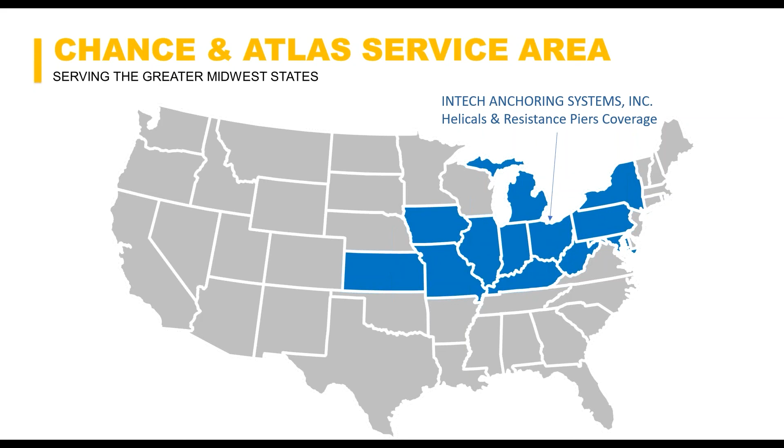So here's a graphic representation of our footprint with Chance helical piers and Atlas resistance piers. Like I said, we're a distributor. This is our territory where our partners are based. We have a lot of activity and experience in these areas with a lot of the local engineers and contractors.

So then this image shows the footprint of where we market our hollow bar micropile MagnaCore. As you can see, we're not restricted to a territory in the United States. We can also offer it out of the United States. So if you have any projects that you need design assistance or solutions for, feel free to reach out.

And then finally, here's our Hydroway footprint. We currently sell and market this solution worldwide, so reach out to us if you have a need for that.

So at this point, I'm going to turn it over to Joe with ChemGrout to present on grouting theory and practice. So feel free to take it away, Joe.

Okay, my name is Joe Schatz. I'm with ChemGrout. We're a manufacturer of mixing and pumping equipment for grout, and we have several machines for the application of anchors and micropiles. We're going to go through a little bit of the theory of cement, the water to cement ratios, and the quality control, and then we'll get into the actual practice of the equipment to use, the operations of how to use the equipment, and a little bit on the safety of the equipment.

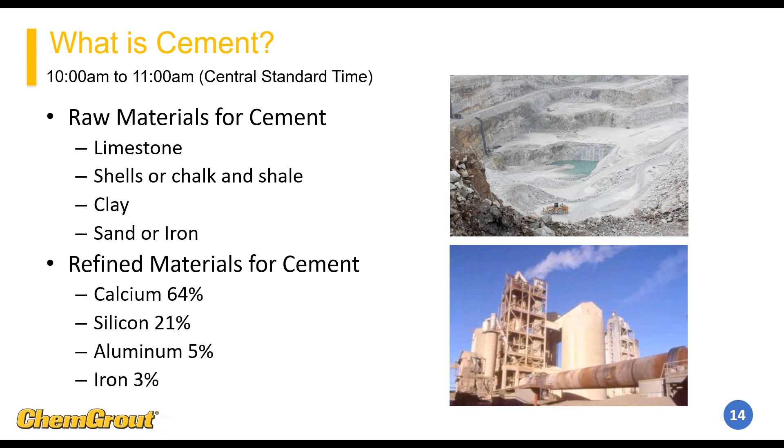So let's start by going through the grout theory. First, the main raw material is cement. Cement is made from several different raw materials: limestone, shells or shale, clay, and iron. And then they grind and refine these materials, and they get the raw materials of calcium, silicon, aluminum, and iron, the raw materials that are used for cement.

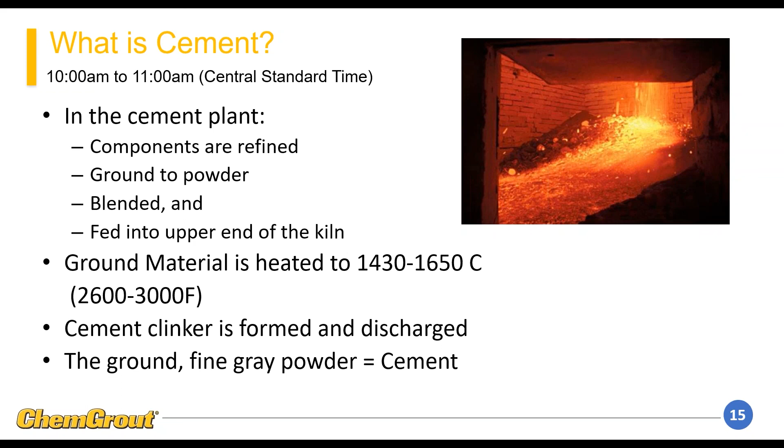Once they have the raw materials, they're all combined into a furnace and heated to a very high temperature, about 2600 Fahrenheit, and ground up into a fine clinker material that ends up being ground into cement. That's the gray powder that we're used to.

Cement's available in several different types depending on the combinations of raw materials they use. Type 1 and Type 2 are the normal raw materials. Type 2 cement is what most people mean when they say Portland cement, which has a moderate sulfate resistance.

The other types of cement are high early cement, which has a quick hydration, and type 4, which has a low heat of hydration for a longer working time. There's also a high sulfate resistant cement used in areas where there's a lot of sulfates, like in sewer systems.

There are other types of cements that are pre-blended. Microsil anchoring cement is regular Type 2 Portland cement with a little bit of aluminum powder for expansion, and often silica fume and fly ash, all pre-blended into the bags, ready to go. The results of the actual micro cement are high early strength, thixotropic properties so it doesn't wash out, and dimensional stability so it doesn't shrink or expand much.

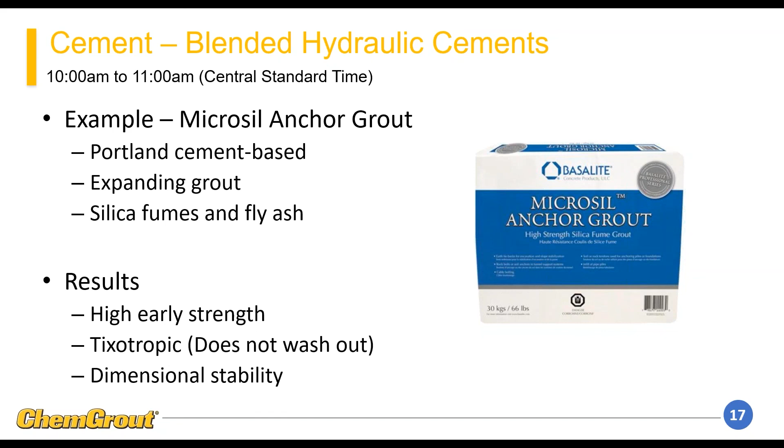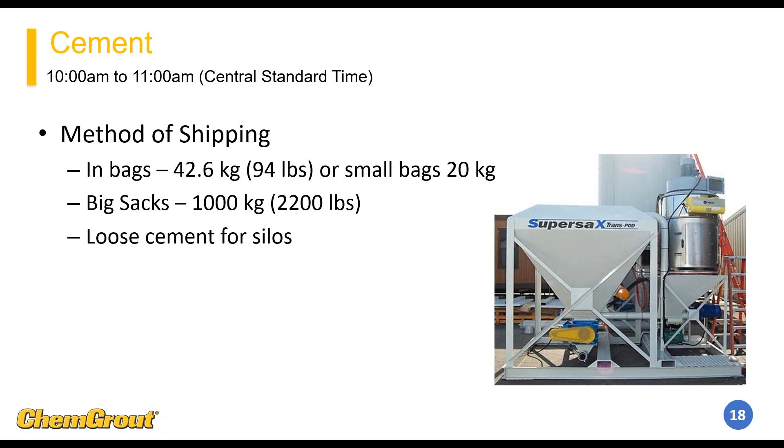Cement is usually delivered in either 94 or 47-pound bags, or it comes in large super sacks. More commonly recently, with the addition of silica rules, we're seeing a lot of either the super sacks or cement in silos used to feed our batching equipment.

Once we have the cement, the other ingredient is water, and the water needs to be clean, potable water. No organic particles in the water, so no river water, no lake water. Make sure it is clean, potable water, and ensure you have enough not only for batching the grouting, but for cleaning up afterward.

The next thing is the water to cement ratios. We can mix the water and cement in different ratios to achieve different strengths. A very common water to cement ratio is 94 pounds of cement to 5 gallons of water, which gives us a ratio of 0.44. We also show some of the metric units.

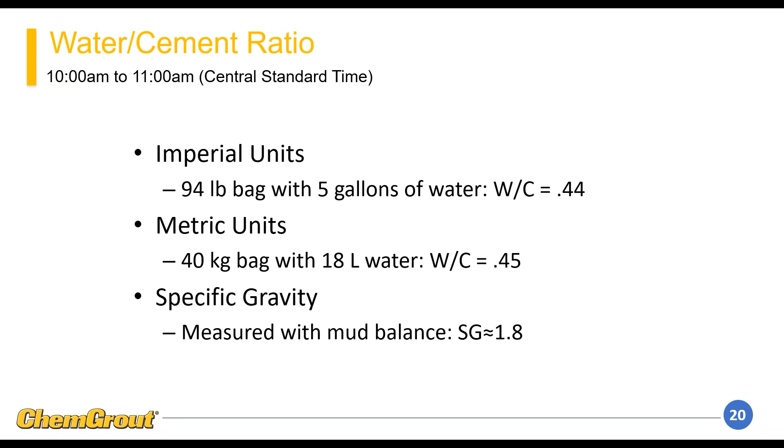When we mix this up, one of the main quality control tests is the specific gravity, measured with a mud balance. For 94 pounds of cement with 5 gallons of water, the typical mud balance specific gravity reading will be 1.8.

In our hollow bar grouting, we have two different types of grout mixes we're going to use. We use a flushing grout while we're drilling, and then when we're done drilling, we pump out all the flushing grout with a structural grout.

The flushing grout is usually a water cement ratio of 0.8, which would be 3 bags of cement to about 27 gallons of water, yielding about 38 gallons total volume of cement slurry. That's what we mix up to use for drilling.

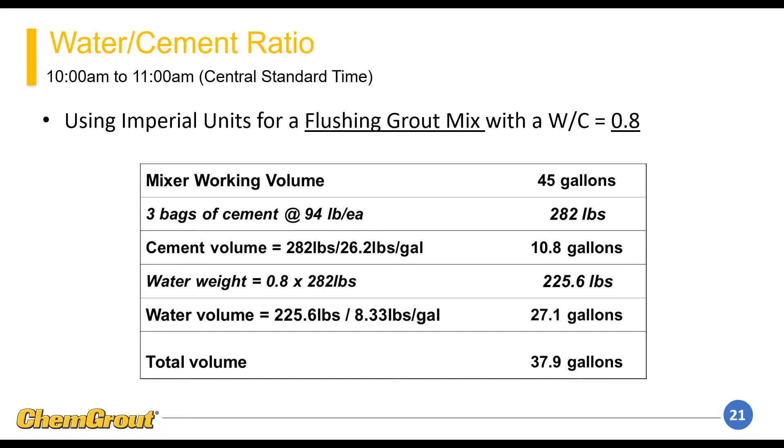The other mix used in hollow bar grouting is the final mix, the structural grout, which has a water to cement ratio of 0.45, typically about five bags of cement to about 25 gallons of water.

Once you're done with your batch, you need to measure the specific gravity of the grout, which will tell whether we've mixed the ingredients in the right proportions. The mud balance involves taking a small sample and putting it on the scale, which weighs it out and tells you the density of the grout. We're looking for 1.8 specific gravity, plus or minus about 0.02.

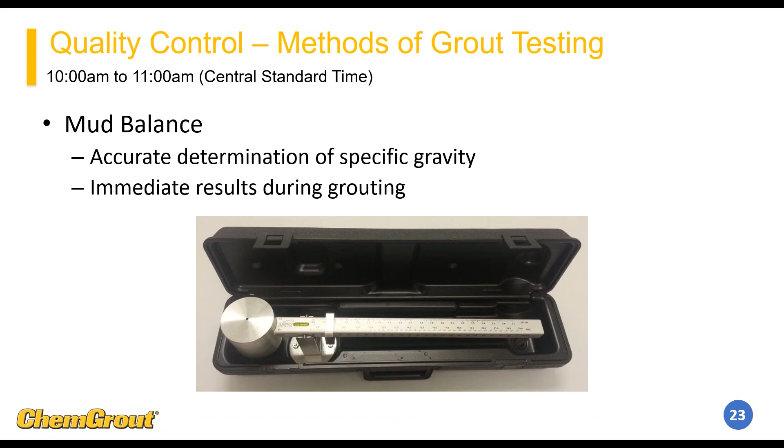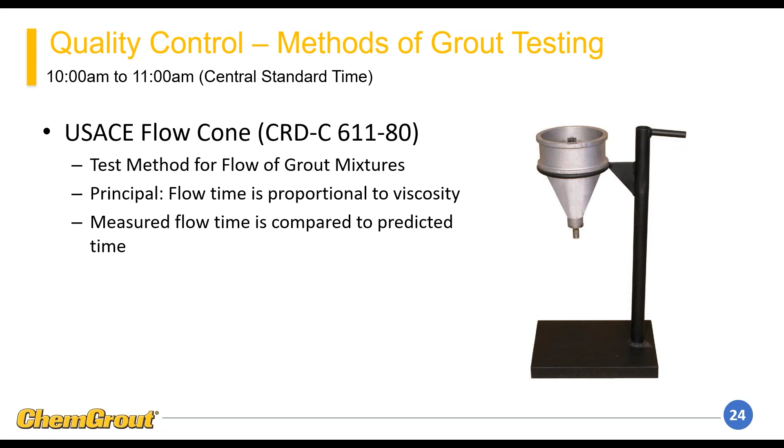Another quick and easy measure is the flow cone test, which measures the viscosity of the grout, another way to determine the proportions. But it's not as accurate as the mud balance. You can do the flow cone test temporarily to get a quick and dirty number, but you really need the specific gravity test with the mud balance to get the accuracy.

A lot of projects will require grout cubes to prove the grout is not only mixed in the right proportions, but that the cement was not old. They'll take samples with these grout cubes, set them aside, and do a compressive strength test at different days during the life of the sample. Typically they'll do a break at 3 days, 7 days, 14 days, and finally one at 28 days. That's just a final check, because it's too late to change anything on the job site.

The grout, cement and water gains strength during its hydration process, and it takes quite a while to fully hydrate the cement. At day 1, you'll have about 45% of the total strength you're going to gain. At day 7, you'll have about 75%, and at day 28, the day most cubes are done for the final test, you'll have about 90% of the overall compressive strength of the grout. Just a note here: adding a little bit of water really changes the grout strength properties. A 25% increase in water will decrease your grout strength by 50%.

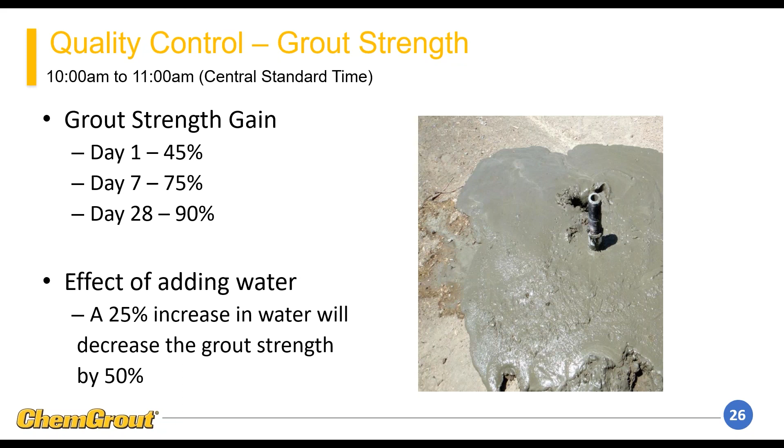Quality control is important on the job site, so you are going to have to report and record a lot of the conditions on the job site. You're going to have to record what type of material you're drilling through and the condition of that material. You need to measure the grout pressure

that you're pumping with to try to get an estimation of the body of grout that you'll have around the anchor. You're going to want to measure the total volume of cement that you injected into the anchor, and then you're going to have to do a test after you've flushed out all the flushing grout and are pumping in the structural grout. You're going to need to do a little sample at the top of the hole to assure that the structural grout is getting all the way back up to the top of the hole.

One of the ways you can measure the amount of grout is to measure the flow rate, or the stroke count of the pump you're using, or use a mag flow meter to record the total volume that you injected in there. And then finally you'll do the water to cement ratio based on the mud balance, which will give you your final specific gravity number.

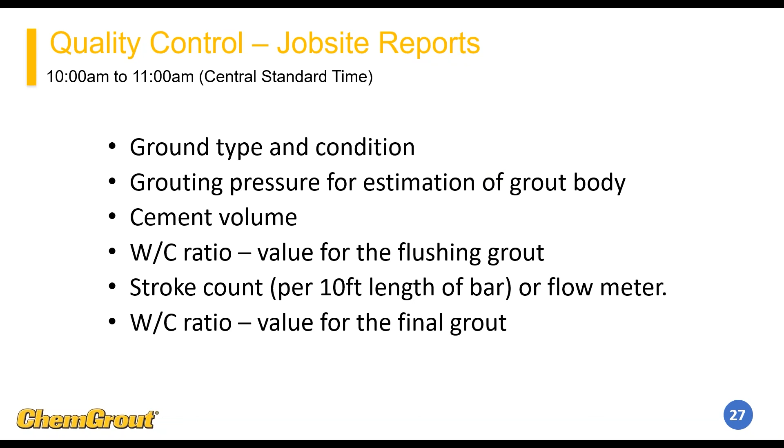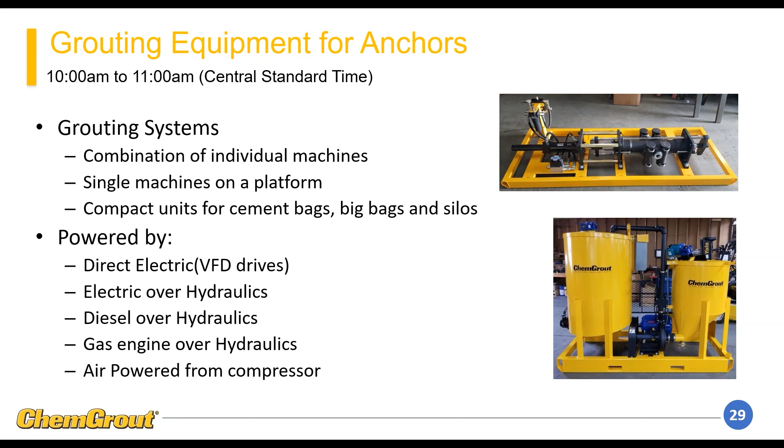So once we have our grout mixed up, let's talk about the equipment and actually installing this material. ChemGrout makes several different types of mixers and pumps for the grouting of anchors. We have a combination of piston pumps, plunger pumps. We have mixing systems of colloidal mixing and shear disc mixing. And then we offer those in several different power options, whether it's electric or diesel or gas or compressed air powered units.

One of the main pumps we use for grouting anchors is our double-acting high-pressure plunger pump. The plunger pump is used because it delivers very high pressure. It delivers a known volume based on the plunger volume, and it's available in variable speed, so you can speed up and slow down the pump. We use our plunger pumps because piston pumps have a very high wear cycle, and the plungers last a lot longer.

We have a couple different types of mixing systems we offer for making colloidal grout. When you're doing hollow bar anchors, you need to have a high shear colloidal type mixer so that you have adequate wetting out of each individual cement particle. There's two ways that we achieve that. One is with what we call a shear disc, which is a high-speed disc rotating at about 3,000 RPMs in the bottom of the mixing tank, and it shears up all the different cement particles. And then we also offer colloidal shear mill pumps, which is a centrifugal style close tolerance pump that offers a high shear into the material. Both of them will achieve a colloidal mixed grout. The shear disc takes a little bit longer than the colloidal mixed pump, which is much more efficient.

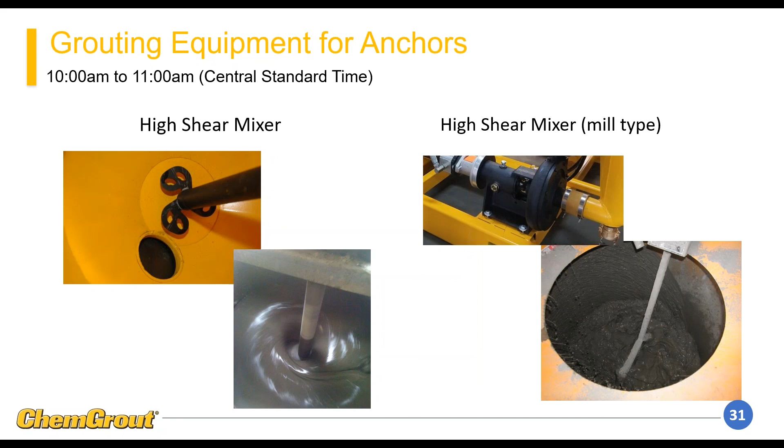One of the primary units used for grouting hollow bar anchors is our CG680 high pressure unit. This would be used on large projects where you're doing a lot of anchors. This pump will do 32 gallons a minute. The normal pressure is about 1500 psi, and this one is one of the units that has the high-speed colloidal mix pump, and then it has an agitator tank, and then it can be powered either electric or diesel. The controls on the pump allow you to vary the flow rate and the maximum pressure that you're putting into the hollow bar anchor.

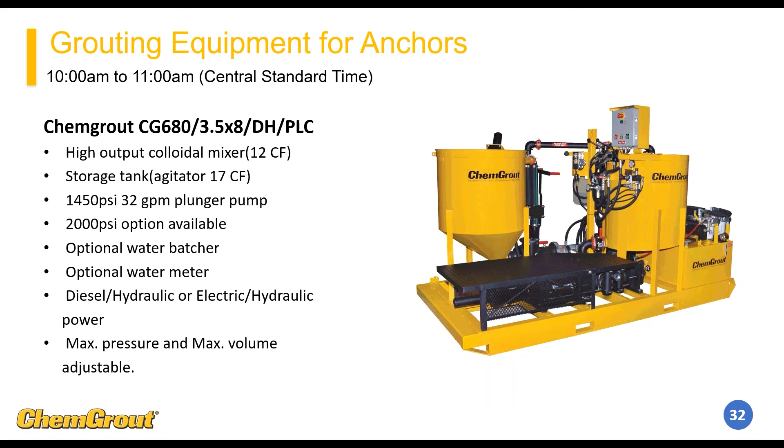We also have a shear disc model, which is used for smaller projects. It has the advantage of having two separate mixing tanks so that you can have flushing grout and structural grout mixing at the same time.

This pump we set up at about 2000 psi to deliver that amount of pressure into the bit to create a bigger grout bulb around the anchor. The high pressure plunger pump is a very simple pump, very easy to clean. This unit is available either air powered or hydraulic, and the hydraulics can be powered by a diesel engine or by an electric motor.

Some of the instrumentation that we like to use: to measure the volume of grout you're actually putting into each anchor, you can use a magnetic flow meter. A magnetic flow meter is non-obtrusive, and the material goes right through the sensor area, and you can measure the flow rate and totals. There are two totalizers, so you can get the total for each hole, and you can also get the total for the entire day.

The other instrument is a pressure gauge, which lets the operator know how much pressure is going into the hollow bar anchor. If you see pressure rising, you can see if the bit may be getting plugged up with clay or debris stuck in there. Between the two of them, it's a good indication of what's going on at the end of the drill bit.

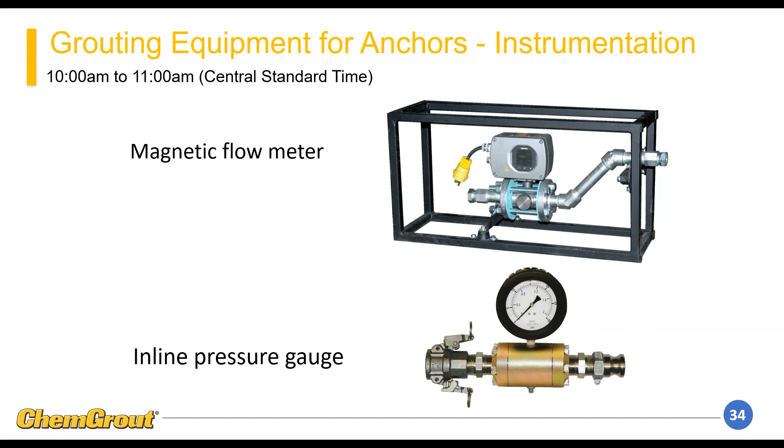For some projects that require recording, we have a monitoring system, a data collector, which takes the data directly from the mag flow meter and from the pressure transducer, and you can get a pumping profile of flow rate versus pressure for each individual anchor. On the actual recorder, you can give it a hole number or an anchor number, so at the end of the day you have a full record of how much grout went into each anchor and what the pressure and flow rate was during the injection.

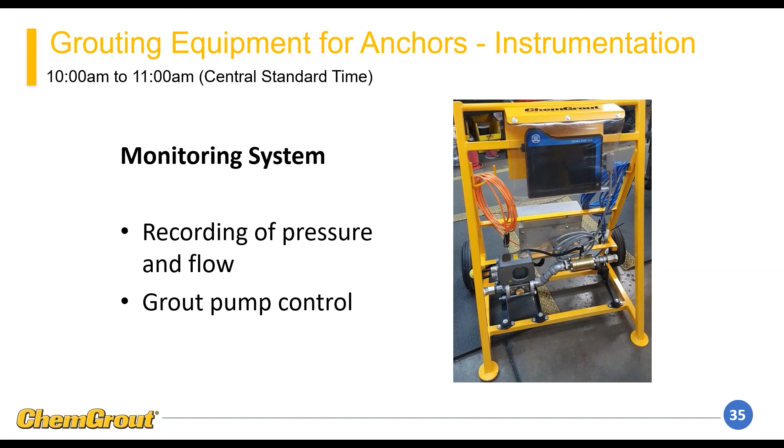We'll move on now to the operator side of things. One of the most important things we can do when grouting is have a trained operator and keep that operator with the machine. The operator should be responsible for not only operating the equipment, but cleanliness of the equipment and minor maintenance, such as greasing the seals.

If a highly trained operator stays with the machine, this will reduce your overall costs of repair and maintenance, and we should have a backup operator available in case our primary guy is sick for the day.

When staging, before you're actually grouting, you want to stage the machine in a central location so that you can just move the hose around and keep the machine in the same place. You want to have sufficient room to store your cement materials and keep the materials out of the sun if it's a hot sunny day.

The mixer and pump need to be on a nice level location, especially if you're using a water batcher where you're trying to measure the water. The equipment should be set off the ground a little bit so that it's not in the mud, or up on some pallets, and right next to that you should have some pallets for the cement and for the operator, and also a couple of pallets for the empty bags.

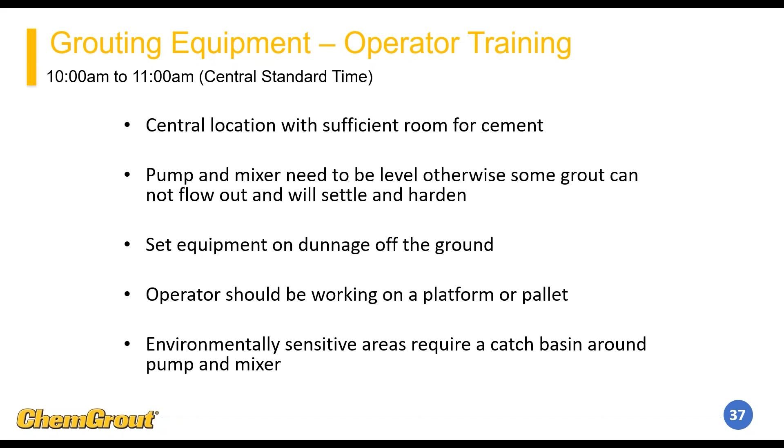One of the things you want to do before you begin grouting is make sure the machine's nice and clean. You want to grease all the grease fittings and add oil to the air motor lubricators. A good way to keep the machine clean is to spray some biodegradable oil or some PAM cooking spray on the outside of the machine, so that when you go to clean it off, it won't be stuck to the machine.

You want to check the engine oil and top off the fuel tank, making sure you have fuel for the day. Check the oil level in the hydraulic tank and check the filter indicator to make sure that you haven't overpressurized anything. Before you begin mixing, check the insides of the mixers and holding tanks, making sure they're clean with no foreign debris and everything washed out. Last, make sure you have a sufficient supply of water to grout all day and enough to clean up at the end.

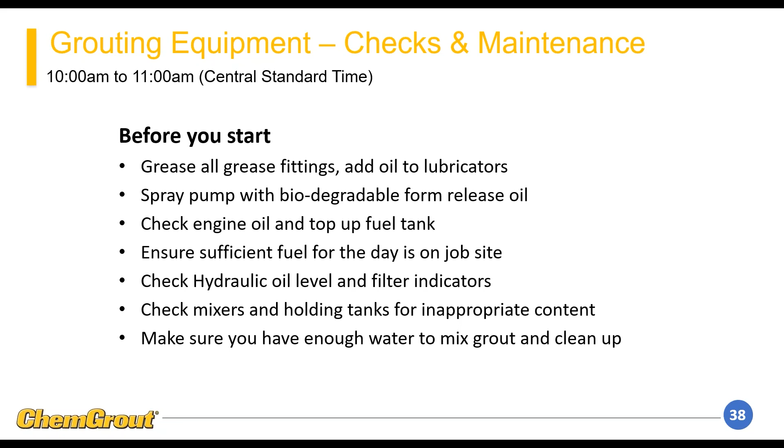When you're starting up the grouting operation, you have to keep ahead of the drill. Before they start drilling, make sure you have sufficient flushing grout mixed up in both tanks so when drilling starts you have enough material to keep them drilling. If you run out of grout during drilling, you need to stop until you have enough made up. If you don't have grout, the drill bit will plug up and you'll have to pull out the entire string and put a new drill bit on, possibly losing the hole.

The other thing is if you don't have any grout and you leave the pump out, you can actually pump air down into the anchor, compromising the bond and corrosion protection on the hollow bar anchor. You need to be able to flip over to straight water.

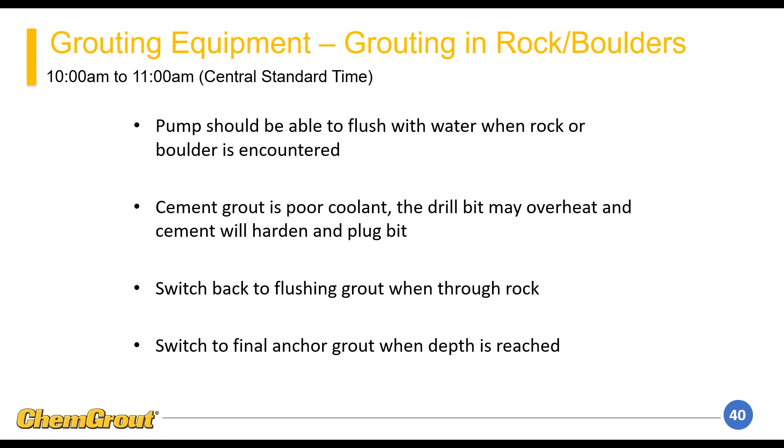There's a valve on the bottom of the tank where you can add water directly to the pump. If you happen to encounter a boulder, you don't want to be drilling with flushing grout or cement at all. Cement's a poor coolant and it may heat up really quick and flash set in the bit. So when you get to a boulder, you need to flip over to water. The water can act as a coolant until you get through the boulder, and then immediately after, switch back to the flushing grout, drill through the rock, and when you get to final depth, switch over to the final grout and grout it all the way back to the surface, measuring the density at the top with the mud balance.

At the end of the day, the cleanup is very important. If you want the next day to go really good, tonight's cleanup is important. So run clean water through the entire mixing and pumping system all the way through the hose. Use sponge balls to clean out any scale that happens to build up on the inside of the hose. Then use a pressure washer to clean the inside of the mixer, the holding tank, and the outside of the machine.

After you're done cleaning up, you want to turn everything off for safety, but check the pump body, check the suction and pressure valves for any grout deposit that built up during the day, and then use a hand brush to remove any grout stuck on the outside of the tank and inside the mixing tanks.

After you're all done, make sure that you leave all of the valves open and the slide gates open so that if it happens to rain overnight, you won't get a collection of water in the mixing tanks. Especially in the wintertime, when the water could freeze inside there and damage either the pump or the mixing systems.

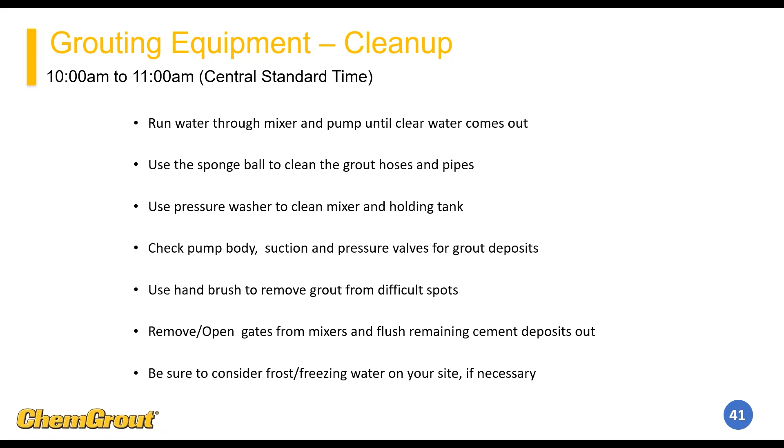Lastly, we'll talk about operator safety training. Some of the protective equipment that is common for grouting operators includes gloves to keep the cement off their hands, rain gear or a Tyvek suit to keep the cement powder and mixed grout off your clothes and skin. Safety glasses and a dust mask are required. Cement is good to protect steel, but it's corrosive to the skin and it can cause chemical alkaline burns.

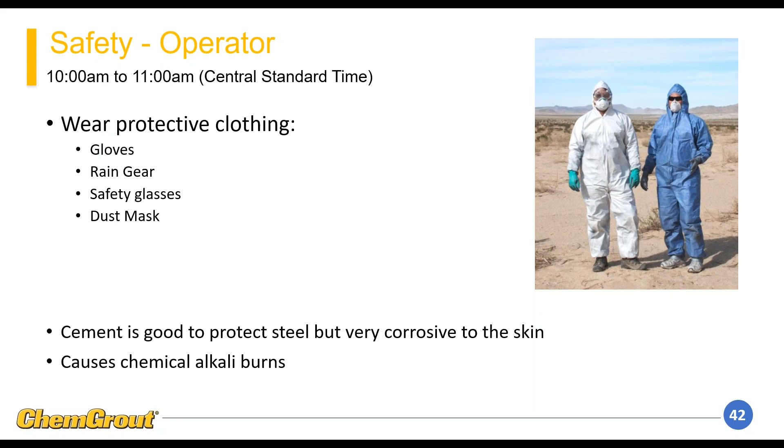It's important that you supervise new workers, stay with them, and train them on all the different procedures that need to be done, and don't just put the guy on the machine and tell him to go to work. Somebody's got to actually train them on what the procedures are and what the mixing ratios are.

They need to remember that grout needs to be flushed off their skin immediately. If left on for a period of time, 3 to 5 minutes, it can start to cause third-degree burns on your skin. So it's important to either have gloves on, and if you don't have gloves and happen to get some on your skin, just rinse it off immediately.

It's very important before you do your cleaning and maintenance work to make sure that you've shut down the equipment and locked it out, de-energizing any potential compressed air or hydraulic pressure, so that it's safe when you're going in there to do the cleanup and maintenance.

Please never stick your hand into a moving mixer or a running paddle. There's safety stickers on the machine to warn you, but please don't stick your hand into the mixer. And please prevent tools from falling into the mixer tank. Make sure nothing can fall in from above, and maybe tie a string onto your cutting knife and tie it to the machine so it cannot fall into the mixing tank.

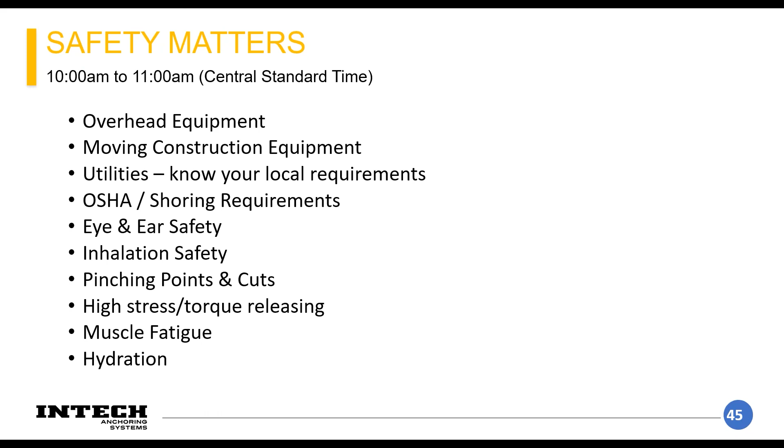Especially with it currently being summer, another thing some people don't think about is don't overwork yourself. You can't continue to do work if you're fighting heat exhaustion. Make sure that you're taking breaks when you should be and maintaining hydration.

A thought experiment that I always like to do is trying to get yourself into a third person. What would you do if you were watching yourself work, or what would happen if your spouse, a family member, a friend, or a coworker walked by? Would they think that what you're doing currently is safe? That task that you're doing, are you doing it safely?

With this constant mindset, it kind of takes you out of the moment of 'oh man, this is really tough, I need to get this done and rough it in there' sort of mentality. It can help you take a second, take the emotion out of it, and get a new perspective - maybe you'll look at it and say, 'I could have been doing this a totally different way and it would have been way easier.' Having that mentality will help you get home safe every day.

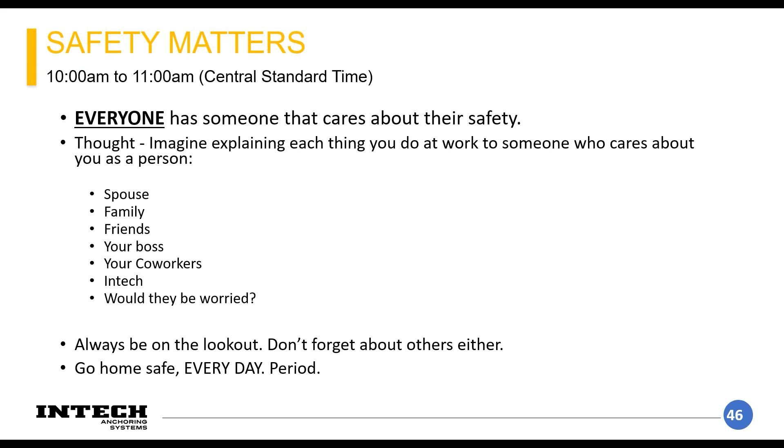And that is the most important thing - make sure that you and all your coworkers and employees are getting home safe every day. So that's my safety soapbox, and now I'm going to get on to the really exciting stuff.

I'm going to start out with each type of element and discuss the individual components of each element and their installation. Then I'm going to go into the engineering design principles behind them.

I'm going to start out with helical pull-down micropiles. Before I really get into the helical pull-downs, I wanted to start with a quick refresher on helicals themselves. Basically, a helical anchor is just a large steel screw that we use to torque into the ground until we find something stiff enough to get capacity. Just like a screw, the element consists of a shaft with some flights welded onto it.

When we transmit torque from a drive head, kind of like a drill, into the shaft, it turns the flights. The flights then screw into the soils and engage the soils until a specific torque or depth is met. It follows that the harder you have to screw the pile into the ground, the more capacity you get out of the pile. Once you get to the end of your element, we finish that pile with a plate termination that gets cast into a footing.

Generally we have two flavors of bare steel element: the square shaft and the round shaft. The square shaft is a solid square shaft that ranges in dimension from 1.25 to 2.25 inches. These shafts are generally our most economical option because they have a high relationship between torque and capacity, and they're generally less expensive.

Our second flavor of bare steel element is round shaft. These are a hollow steel section of structural tube that range in dimension from 2.875 inches outside diameter to greater than 4.5 inches outside diameter. These types of shafts are advantageous due to their ability to resist lateral loads, and they have a better unbraced length strength. However, these round shafts are slightly more expensive, so for the most part we only select them when we have concerns for lateral stability, a relatively thick weak soil down in the profile, or a weak soil near the surface of the profile.

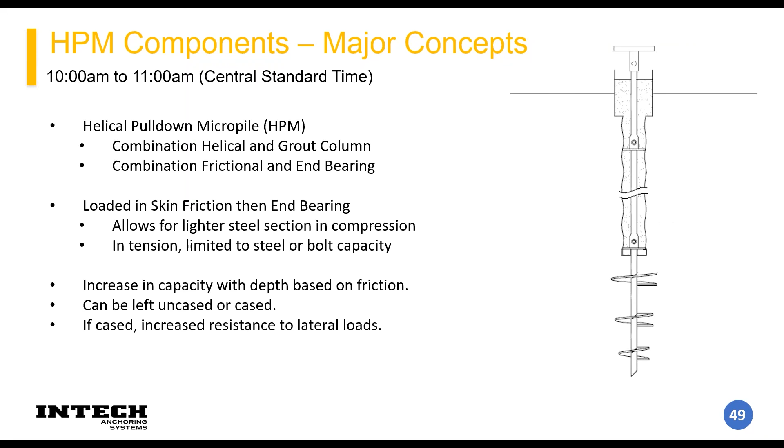Additionally, these elements have the option to be either left uncased, where the soil is the outside diameter, or cased for the upper depths, which is what we typically see. If casing is used, it can be used to bolster the lateral resistance of the pile section.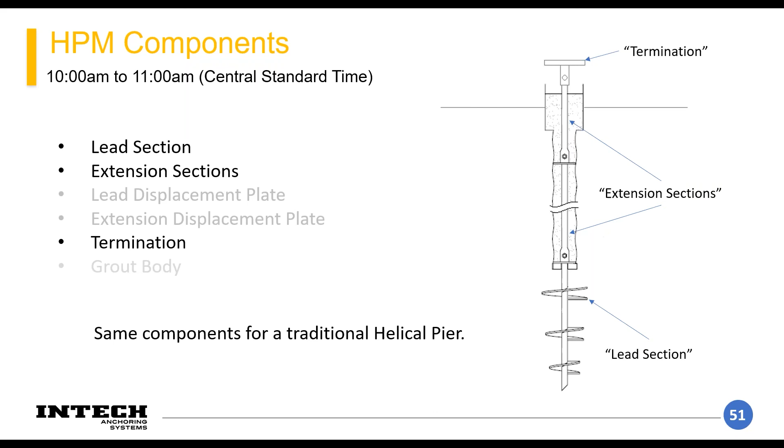Here's a list of the major components for the helical pull-down. These sections are literally just the same components as a typical traditional helical pier: you have your termination, your extension sections, and your lead section. The only difference for the helical pull-down micropile is you add the lead displacement plate, the extension displacement plate, and then you have your grout body.

For the uncased pile, the size of the lead and extension displacement plates will dictate the design section of the element that is installed. For a cased pile, we typically use the size of the smaller extension plates that'll go through the casing, but it'll be dependent on your specific pile design.

Here's a closer look at the lead and extension displacement plates. You can see on the bottom right, the lead plate is a round steel plate that slips over the bar, and it has two paddles that displace the soils as the bar is turned. At the top right, you can see the extension displacement plate is that same round steel plate that slips over the bar, but it doesn't have the paddles.

These are put at each extension section that is added to the bar during installation. When you get the bar sticking up out of the ground, you add one of these, then you add your extension. I think there'll be a visual representation of that in a moment.

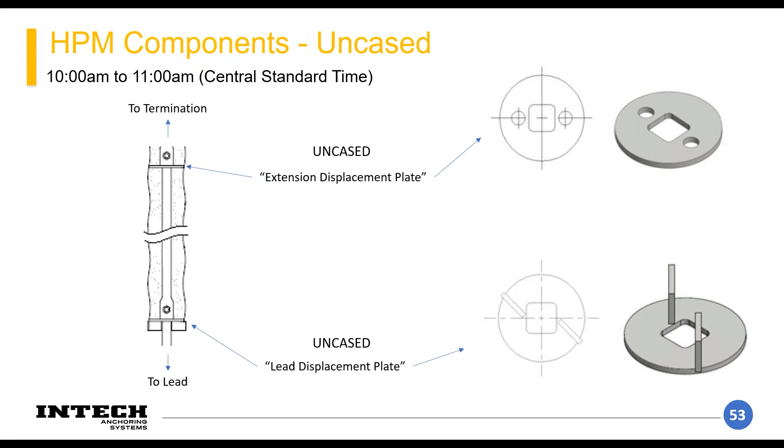So then the same thing happens. The bars torque the round plates, which turns the paddles and displaces the soils with the lead displacement plate, and then maintains the hole diameter during install with the extension.

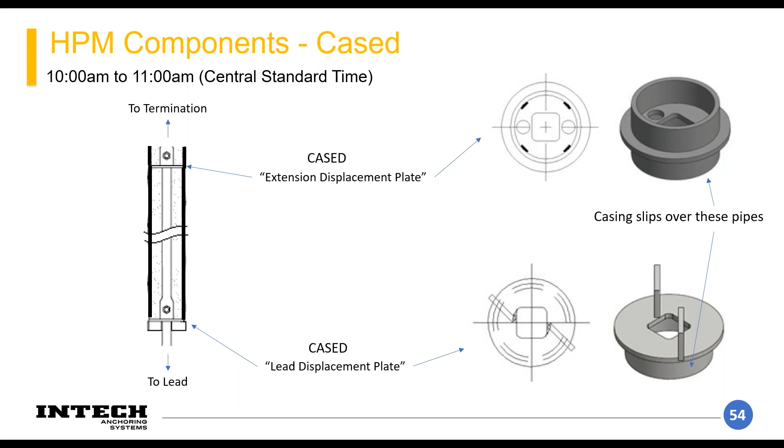For those of you who are more visually inclined, this should give a good idea of what it looks like to install a helical pull-down micropile. This is my first example - I'm going to show an uncased installation, and it'll include a grout column for all the extensions.

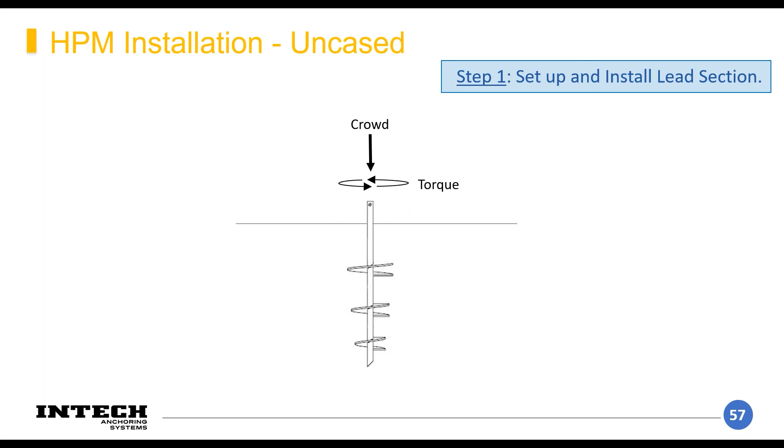First, you set up and install your lead section by applying crowd with your equipment and applying torque with your drive head. You're pushing down and screwing the lead section into the ground. You're not drilling - you don't want a bunch of spoils to come up out of your hole. You just want to move the soils out of the way slightly, and you do this until there's a little bit of stick up out of the ground.

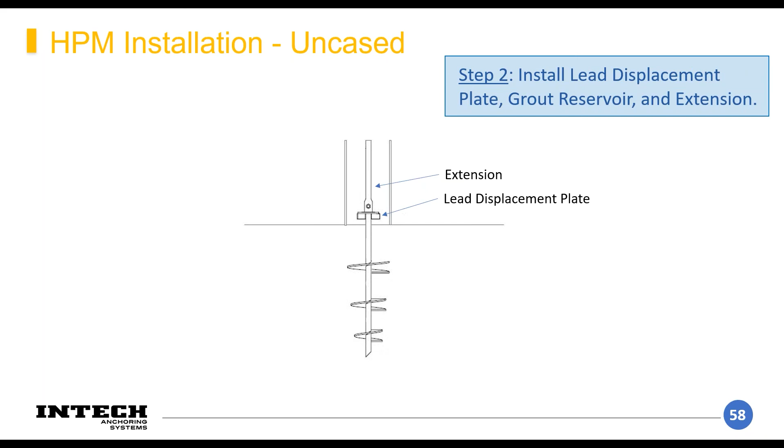After that, you add your lead displacement plate, the one with the paddles, and then you add your extension. You also want to set up a grout reservoir that'll hold grout during your installation.

We usually see this being done with just a sonotube, and it needs to hold enough grout to where you're not constantly filling it, but not big enough to where you spill out excess grout at the end of the element whenever you take it away. Another note is you're probably going to have to bury the reservoir a little bit or seal it around the bottom so grout doesn't come out.

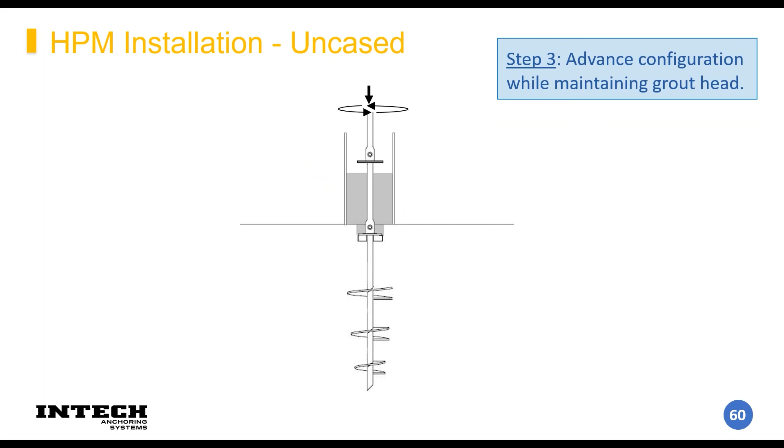So you fill your grout reservoir, and then the next step is advancing your element, applying more crowd and torque. The extension displacement plates and extensions should be added as necessary as the configuration penetrates the ground.

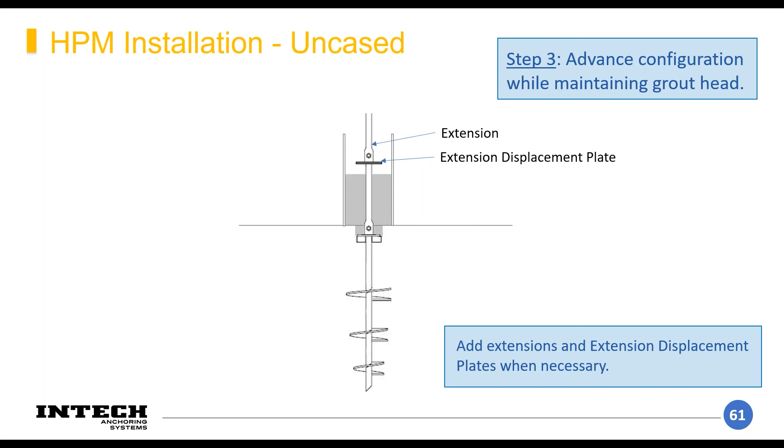You can see you've advanced it a little bit. The lead plate is digging into the ground, starting a column, and you're just maintaining grout and adding extension plates as you go. So the lead plate creates the annulus, and the grout creates the column.

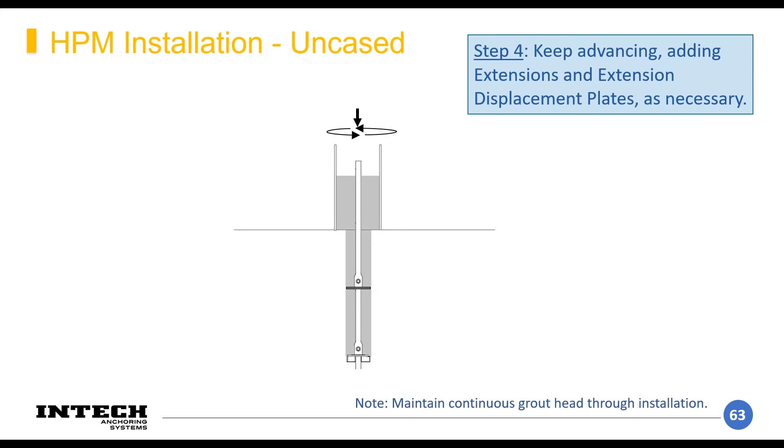Keep doing the same thing - applying torque and crowd, adding your extension plates and extensions as necessary - and you maintain your annulus, and your lead plate creates even more of a column as you go down. Then once you achieve your depth and torque, you can cut off excess shaft and terminate it with a pile cap.

One thing that's important to note on these elements, as they're both frictional and end-bearing elements, it may be necessary to double check that the installed pile meets your design criteria. What I mean by this is if you torque up early, it may mean you have less frictional resistance than you planned on for your design. So you just have to check that the combination of the steel helical and the leads can take on the remaining load, and that the soils can calculate out to take the loads as well.

So if you're doing an initial design or installation of one of these and you run into this and you're worried about it, just reach out to us and we can help troubleshoot it with you and help come up with a solution to get it to work.

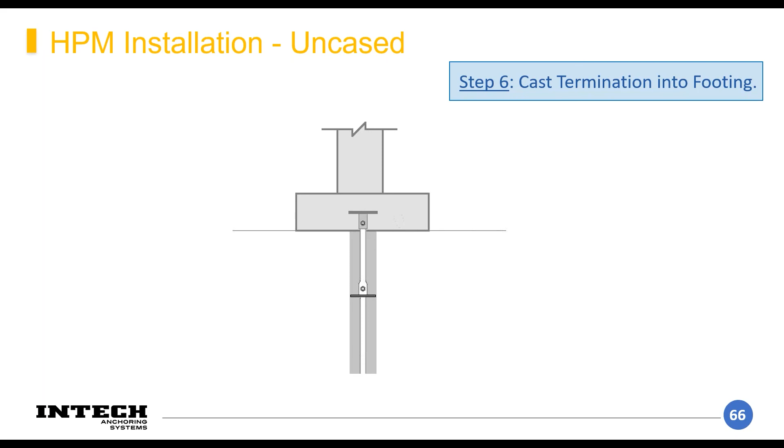At this point, the foundation contractor will cast the termination into the footing. It's important for design to have the cap in a spot that doesn't interfere with the other reinforcing in the pile cap. That'll ultimately be on the structural engineer of record for the footings, though.

So here's the completed element with each of the components that we discussed.

Now I'll go into our second example of installation, but this time it'll be for a cased element. The installation is mostly the same, but there's a way that we'll handle the grout and extensions that'll be slightly different at the beginning of the install. I want to note that you can fully case your element, but we find that that's relatively uncommon.

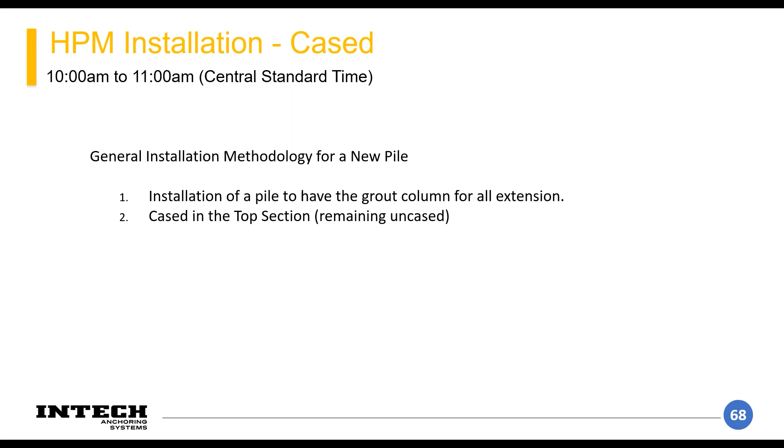What is more common is to install casing in the upper 7 feet or so for lateral resistance. So with this method, we'll install casing in the upper portion of the pile and leave that casing up top while we continue our pile down, just so that we can resist that lateral load within the range that the moment has to resolve.

Just as before, we start by advancing the lead section. We apply crowd and torque until the element is mostly into the ground. At this point, you'll add your cased lead displacement plate, extension, and casing.

Before you advance the pile, add your extension displacement plate, then you slip your drive head over the shaft. You want to kind of sandwich the casing between the extension displacement plate and the lead plate. You want to do this in a way that it keeps them together, but you're not pushing the system into the ground. You're just keeping them tight, and the lead flights should pull everything down while the drive head keeps them sandwiched together.

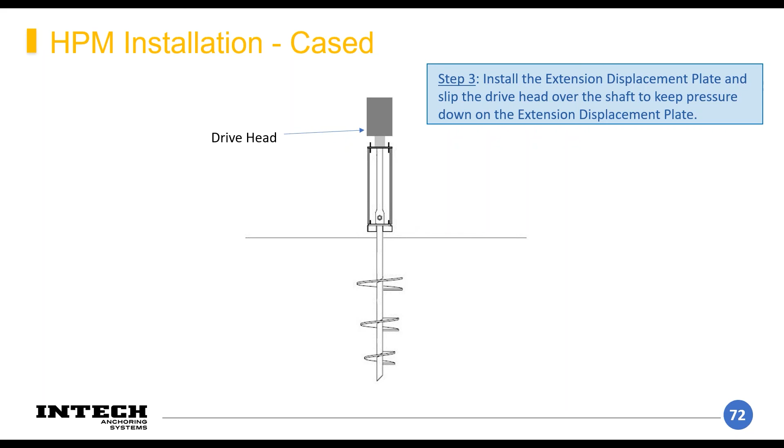So with that, you pull your amount of casing into the ground, but not far enough to where you can't retrieve your extension displacement or your extension plate.

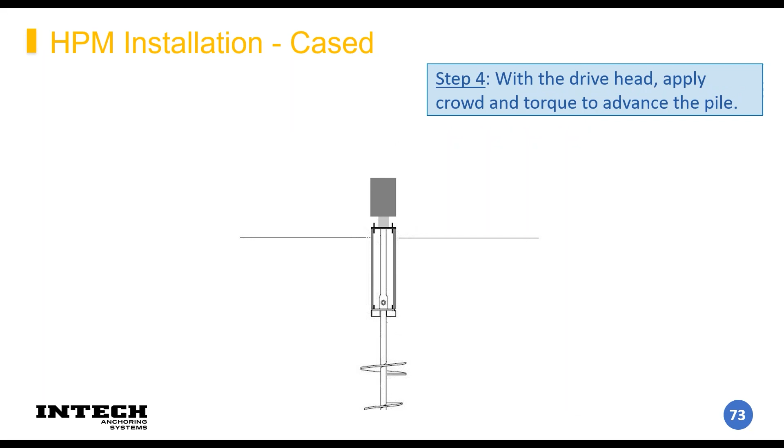At this point, remove your cased extension plate and install a grout reservoir. Fill the grout reservoir and add extension plates and extensions as necessary to achieve more depth.

Note that for these elements, you switch over to a specifically sized extension plate that fits inside the diameter of the casing. Typically for design, the lead displacement plate is slightly larger than these extension plates, so we slightly reduce the pile diameter to the smaller extension plate diameter or somewhere in between.

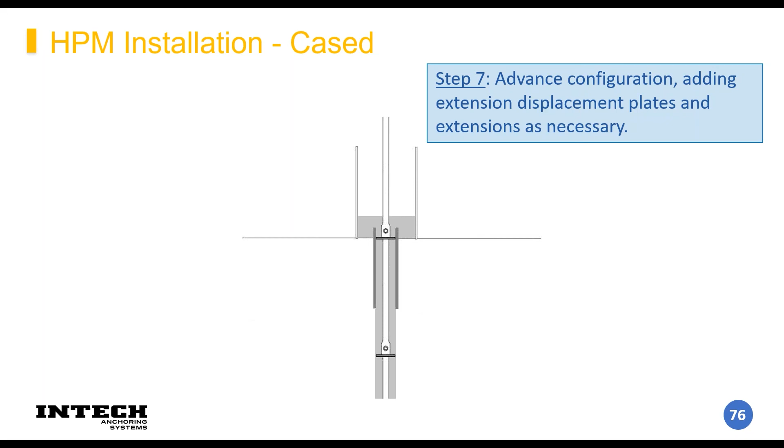You repeat this process, adding more length of pile with the extension plates being slightly smaller and passing through the casing as you go. You keep creating that annulus as you go with depth so you can have a relatively long micropile section that isn't limited.

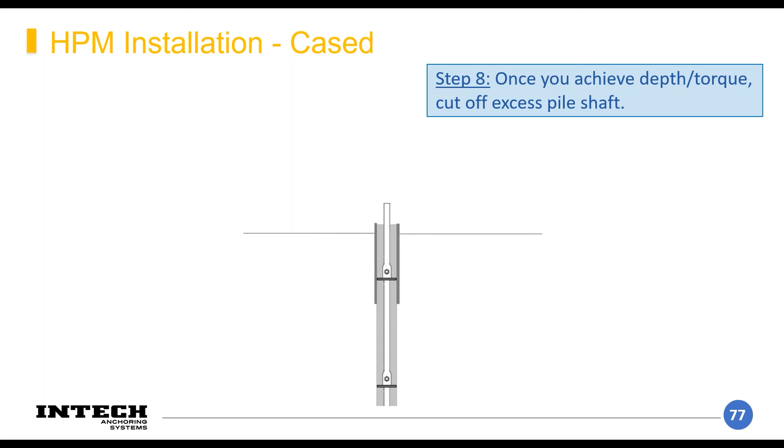Once you get to your torque and depth, you can cut off your pile. Like I discussed earlier, make sure you pay attention to both the length and torque on these. Since they are both frictional and end bearing, you might have to make some adjustments during construction to make sure the installed pile meets the requirements for the project.

Now you've taken away the reservoir, you cut off the shaft, and then you just fit a pile cap on top and bolt it if necessary, and that's it. Now the termination gets cast into the footing and you're done.

Here's a representation of a completed, partially cased helical pull-down micropile.

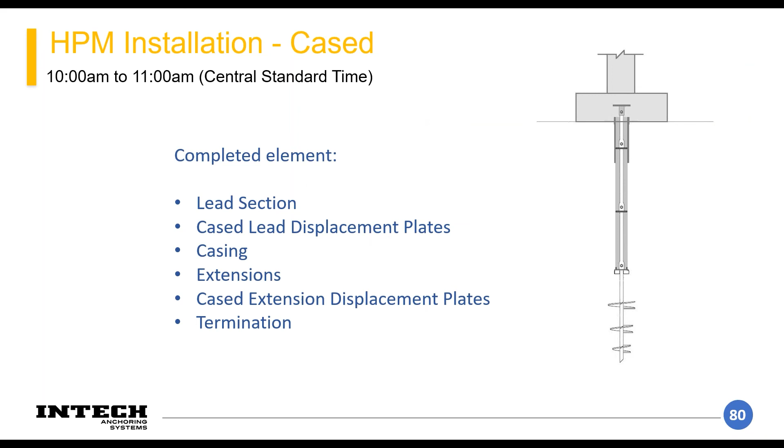Here's a couple pros and cons for the helical pull-down micropile and when to use it. Like discussed before, you can use less steel section by carrying more load in the grout and friction. The torque should be monitored during installation, and we can go back and figure the strength of those materials we penetrated to double check calculations so you get confirmation. You get an increase in capacity carried from the skin friction and also get additional strength in end bearing, which is good, especially if you don't have something really hard. If you have a marginal soil or stiff, you can get some of that end bearing.

You can advance casing with one piece of equipment. You don't have to go in and install it beforehand. You can pull it down with your element, and it's a good one-pass with a gravity-fed grout annulus installation method. So it helps keep the hole open during installation. You don't have to put in and withdraw casing as you install.

Some of the cons include: the grout needs to set up before load testing. This can be alleviated through admixtures or starting with a higher strength grout and confirming your grout with breaks, but that's just something you have to watch out for. Also, you can't penetrate into rock sufficiently to create a rock socket. You can get the tip to seat into the rock a little bit and count on the shaft to structurally transmit the forces, but you can't fully get a rock socket in.

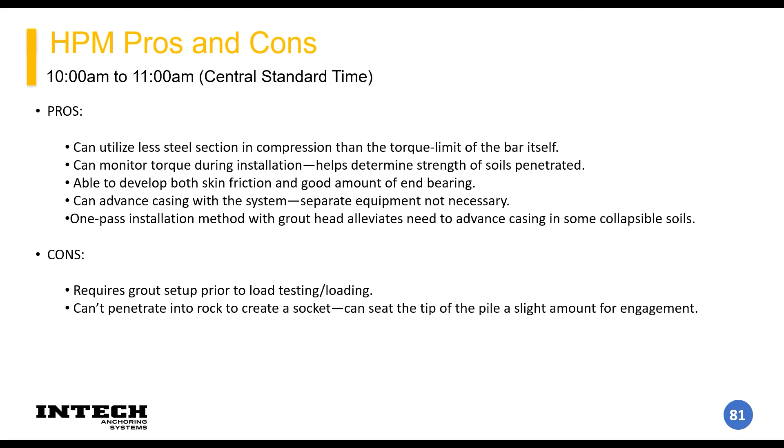I've also included a snapshot of the different square shaft ultimate capacities as well as the torque ratings. But like I said before, if you're doing a helical pull down, we can achieve a much higher capacity with a combination helical micropile than just the helical itself. So these loads are just the starting point.

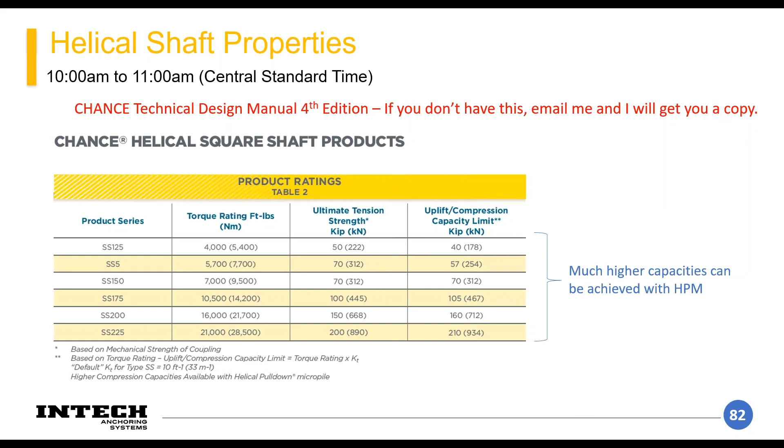I can also get you access to Helicap, which is the software that Chance came up with that lets you input the soil profile and estimate what bar size and grout column you need to achieve a specific pile capacity. There's also some tutorials on the Chance website that do walkthroughs of how to use the software. Feel free to contact us to get access to that, or search Helicap and Chance, and it should be pretty easy to get signed up.

So now I'm going to discuss hollow bar micropiles, including the components and then the installation.

This is pumped through the element at the end of installation, and it displaces the flushing grout that was used during drilling. Third is the coupler, which attaches the different sections of the threaded bar together to add length as you drill. Finally, we have the sacrificial bit with holes or ports that cut into the soil profile to create the annulus. Typically, we use the diameter of these bits in design for the diameter of the grout column, which is actually conservative because we're going to be slightly pressurized grouting these, and it'll tear away at the walls of the column, so it'll be conservative.

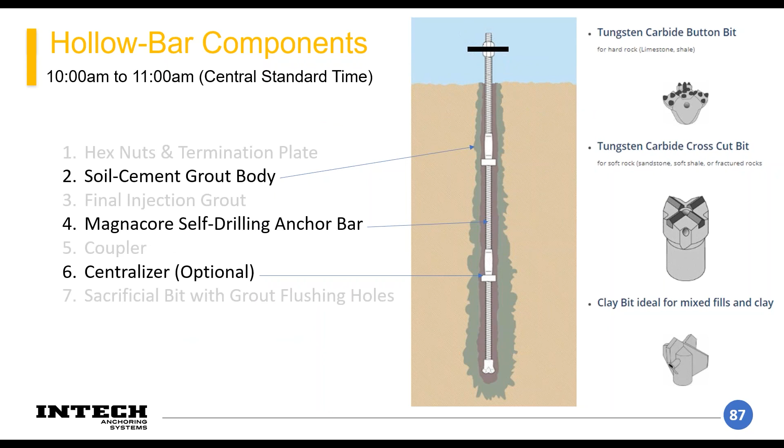Second, we have the MagnaCore self-drilling anchor bars. These are threaded hollow tubes that transmit the forces during drilling. All of this is also sacrificial, so it acts as the pile reinforcing during the design life of the project. We have both rope threaded and trapezoidal threaded bar, ranging in diameter from about 32 millimeters on our thinner line up to 103 millimeters for our heavier bar. Finally, you can add centralizers, which are important if you need to hold the reinforcing towards the middle of the hole, especially in horizontal drilling applications.

I discussed bits earlier, but wanted to go a little more in depth. We have different bit sizes ranging from a few inches up to 8 or more inches, which makes up the diameters of the holes we use for design. Feel free to reach out to us if you have a specific combination you want to use, and we'll see if it works out well or if we have to get around it in any way.

First, I'm going to discuss the clay bit at the bottom right. This is ideal for mixed fills and softer clays. If you have a relatively clean profile with no real dense or hard spots, we can get away with using that one, but it's a little risky. The second one, in the middle, is the crosscut bit. This is a pretty common bit that we use. You're able to get through denser and stiffer profiles, and you can even get a rock socket several feet into somewhat competent rock. But if you have hard rock, or if you're planning to go pretty long into rock for capacity, at a certain point it becomes more efficient to use the button bit. You'll spend too much time with the crosscut bit than you would if you just switched over to a button bit.

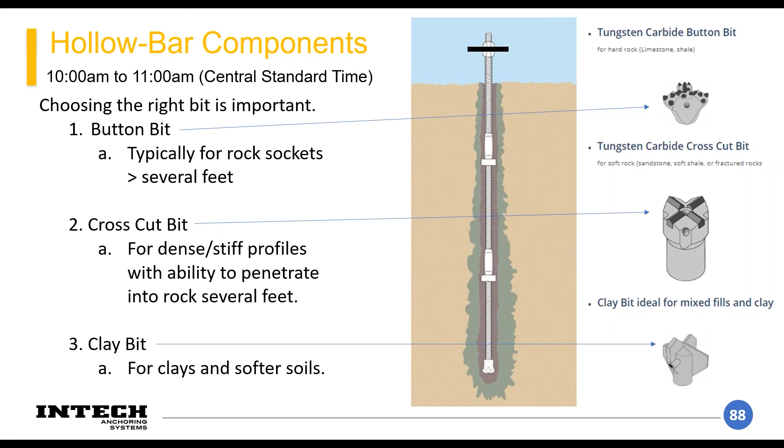A button bit has little buttons on it that tear and pulverize the rock, and it goes a lot more quickly into competent rock.

Each of the bits have grout ports. So when we install these anchors, the grout goes into the drill, through the bar, through the couplers, and finally through the ports at the bottom of the bit.

With this method of installation, whenever the drill is being advanced, there should always be grout flowing through the system, all the way down to the bottom and out the tip. Always start pumping grout first as you advance the drill string.

The following slides are a graphic representation of how these get installed. You start with your lead section at the location you want to install your pile, attach this section to the drill string, start pumping grout, then start drilling.

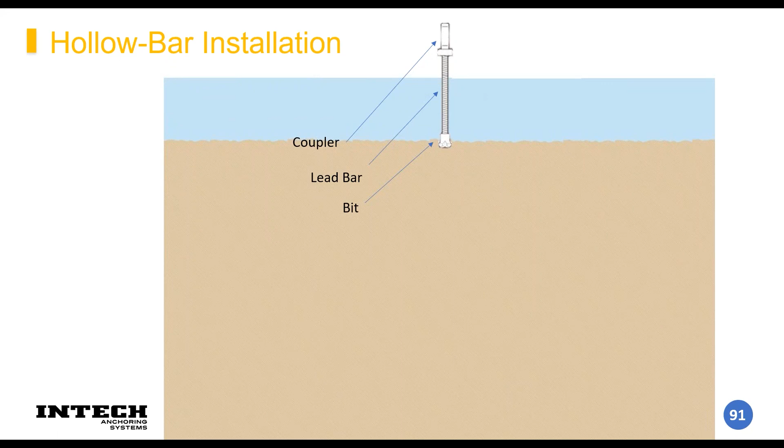You advance your lead section with grout pumping. At this point we'll be using flushing grout, and it'll be at a relatively thinner mix than your final grout, if allowed on your job.

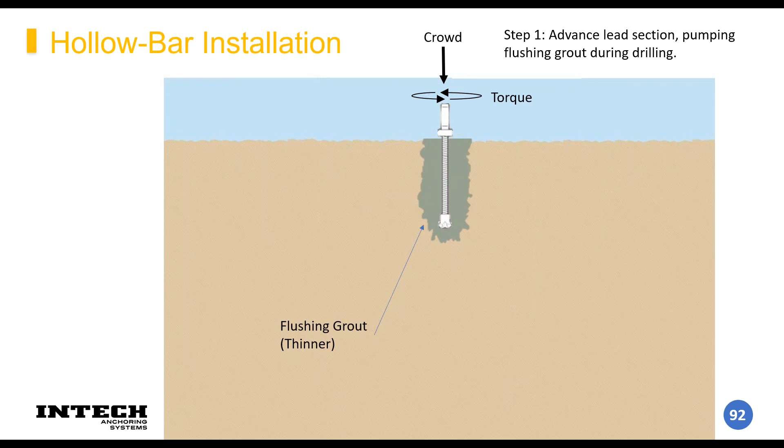Once the top of your lead section is a little above the ground surface, you disconnect it from the drill, add a coupler and your next bar extension, then reconnect everything to the drill and keep drilling. It's important to note that the drills have a hammering action.

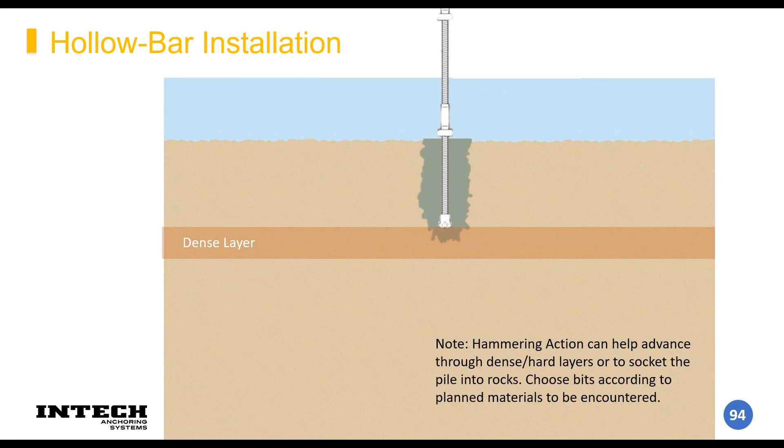This isn't always needed, but when you hit a dense layer, you can hammer through, similar to how an impact drill works. It'll help advance through those dense zones or tear through boulders, and it'll help later when creating a rock socket as well. You hammer through the dense layer while also applying your crowd and torque.

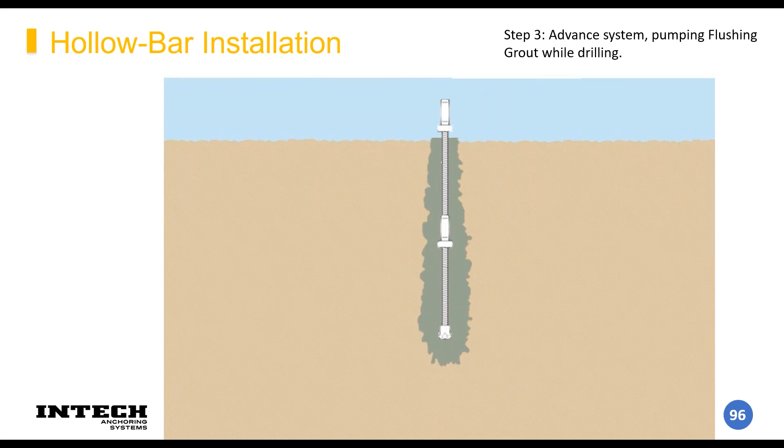Advance your system, pumping flushing grout always while drilling. Repeat the steps until you get to your design depth, so you're just crowd torque drilling.

At this point, terminate with the plates and nuts as the design requires, then cast your termination into the footing. One other note is that for these elements, you can utilize casing.

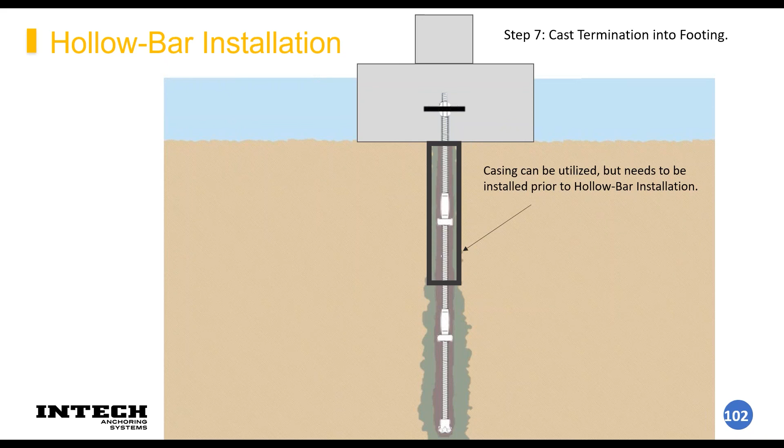Currently, typically when we see this happen, somebody goes out and installs the casing to the depths you want at the locations, and then you just install your hollow bar micropile through the middle of that.

Pros and cons for this: hollow bar falls under the design guidelines put forth by both the FHWA, PTI, and a bunch of others. So it's very well established.

With hollow bar, you can create a column even into dense profiles and rock, several feet to a lot of feet of rock, for a good rock socket with a button bit.

When permeating grout into the soil profile, we get better bond strength, so we're improving the soils. We'll typically overperform relative to our design.

With it being a one-pass installation method with constant grout, we won't have that problem with hole collapse while installing. It's a good alternative to conventional micropiles that require a cased method of installation, where you have to put in and withdraw your casing. That labor adds up, and our one-step method really is competitive with that.

So the cons, similar to before: the grout needs to cure before you can test. You can use admixtures or a higher strength grout if you need to do something fast. There's also no quantifiable feedback of what was encountered from a strength standpoint.

So you don't have a measurement of torque like we did before. But you can tell if you're getting into something dense and have to hammer through it, or once you hit rock, it's definitely pretty obvious.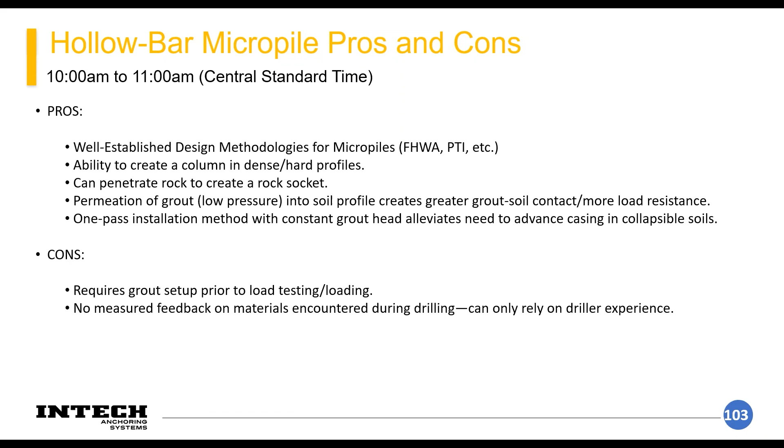As discussed earlier, the two types of bar don't fit with each other. So if one system carries a T style or an R style, they won't fit together. But we have adapters, and we can help you get something that'll fit for your equipment, or help you adapt over to another bar style.

So we're at the home stretch. I'm going to try and go through this pretty quickly because we're at 55 minutes right now. I'll go through these structural checks and geotechnical design checks, but I want to preface it: this presentation is topical. It's just meant for you to get an idea of what's going on, so when you read through the design methodology you have an idea of what it looks like and what you should be considering. So don't use this as a basis for your design, just use it as your initial look through so you can get oriented.

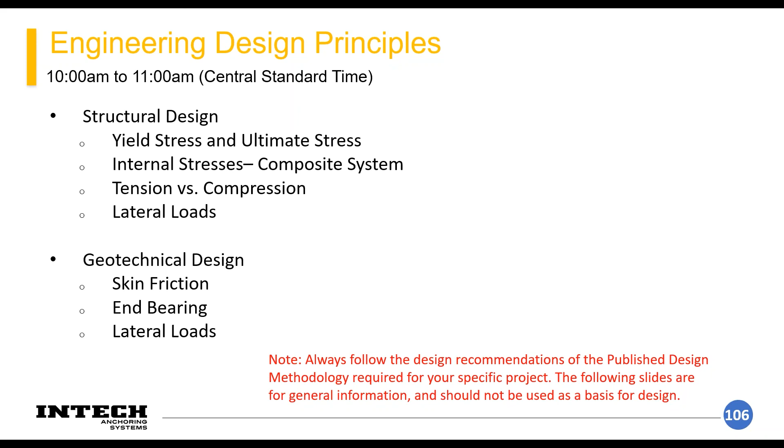So the first point for structural design is the structural checks, and what is required for your design methodology. Every project is going to have a design methodology called out for it, or if you're choosing, you should choose a design methodology to follow so that everybody designs to the same thing. The main concept we're digesting on a project is we're given a design load: how much steel and concrete do we need, how strong of a section to carry the loads down structurally.

We generally use the same design methodology checks for both the helical pull-down micropiles and hollow bar, making sure those pressures don't exceed the strengths of the grout and the steel. But for the most part, the helical pull-down steel sections are pretty solid compared to the hollow bar sections, and those typically control through torque, so it usually doesn't have a large effect on our design for the helical pull-downs.

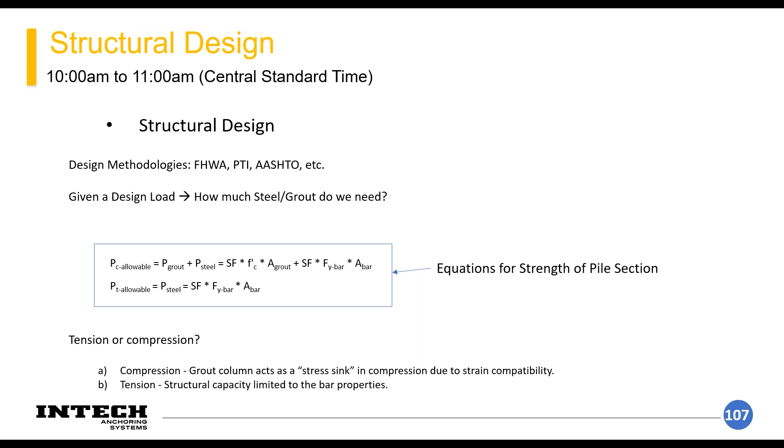So we check these elements depending on if the element is going to be loaded in compression or tension or both. The two equations shown are the checks we use to determine if we have enough strength to carry the loads. The top equation is the allowable compression capacity of a pile section. With that, we check the allowable load on the grout column, which is related to the size of the grout column, and then the steel capacity. The bottom equation is what we check against the planned tension load, and this only includes the strength of the steel.

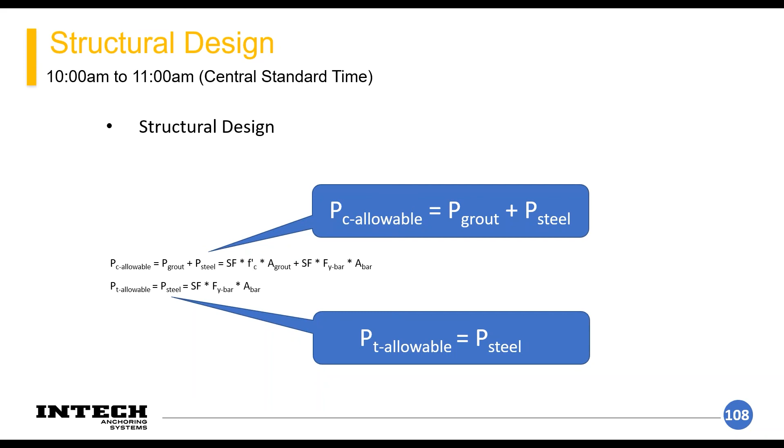This is just a blown up slide that shows the individual terms of each of those equations. There's a few variables represented here. Please use the correct factor of safety and the correct FY, the yield strength of the bar, in their respective places as the specific design methodologies require. As I mentioned before, we have different factors of safety for the grout, a different factor of safety for the steel in compression and for the steel in tension. So especially with how these are laid out, pay special attention and use the right factor of safety in the right spot.

Also, as engineers, what are the factors of safety for? Consider things like how was the grout mixed, how well did everyone follow the mix design, how fresh was the cement. And for the steel, how is it manufactured, stored, and handled. We just want to include some sort of buffer that takes care of these things, to make sure there won't be any problems. The design methodologies have recommended safety factors to use, and they specify what FY bar you should use relative to whatever testing you have.

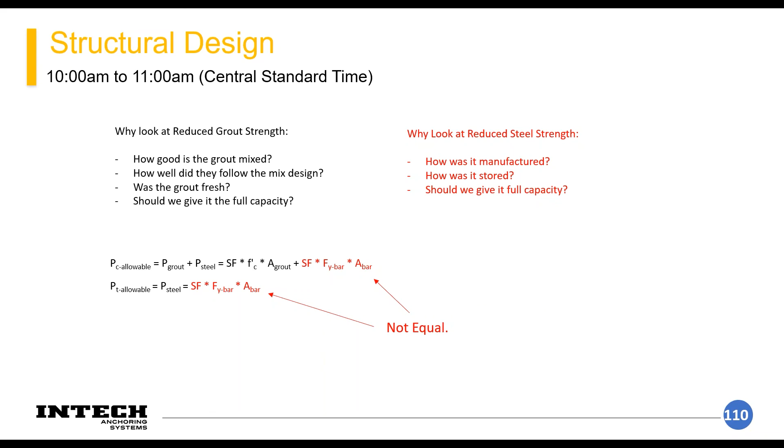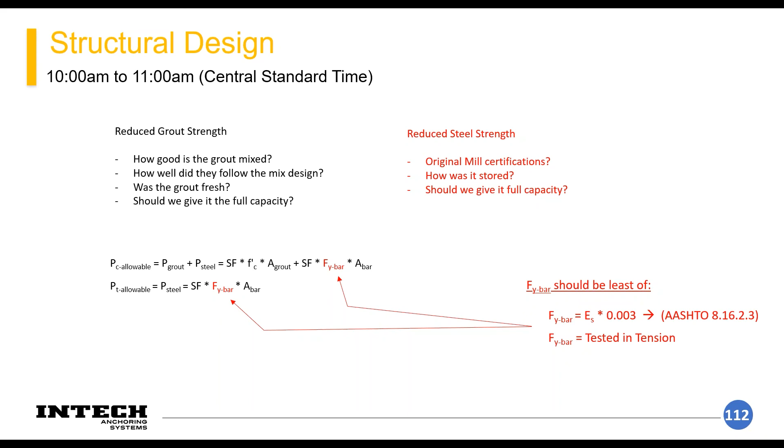So like I said before, use the right safety factor. They're different per each term. For the steel strength, it needs to be the minimum of the comparison for the grout and steel, which is that top equation, the modulus of the steel times 0.003. That's because if you strained too far, the grout would fail by then, so you got to limit it to that. Or if your bar has a lower yield strength than that, then you use that lower strength.

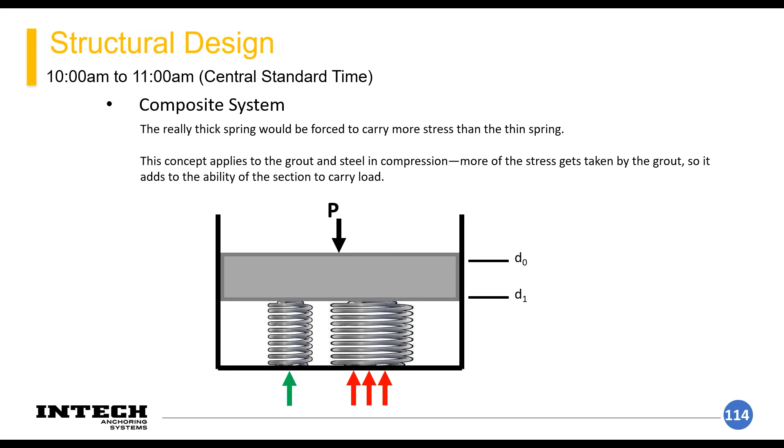The way I like to think about the strain compatibility of a grout and a steel element: if you had two springs attached to a block, one fat and one skinny, and you push down on everything uniformly so the block had to move down the same, how would each spring act? The fat spring would have to take on more of the load and the skinny spring would do less, because that's how stress and strain works. In compression, the grout's going to be the fat spring, as it does very well in compression, it'll take on more of the stress and you won't be relying on as much of the steel. In tension, you won't be counting on the grout as well, but the steel will perform much better.

So we check these two things on each of the designs: we check the design strength with the design load, and we check the test strength with the test load. Basically, we use a reduction on the design strength of the pile, which adds conservatism. Then we also reduce the strength of the bar for the comparison with the test load, but we don't reduce it as much since it only has to perform during that test.

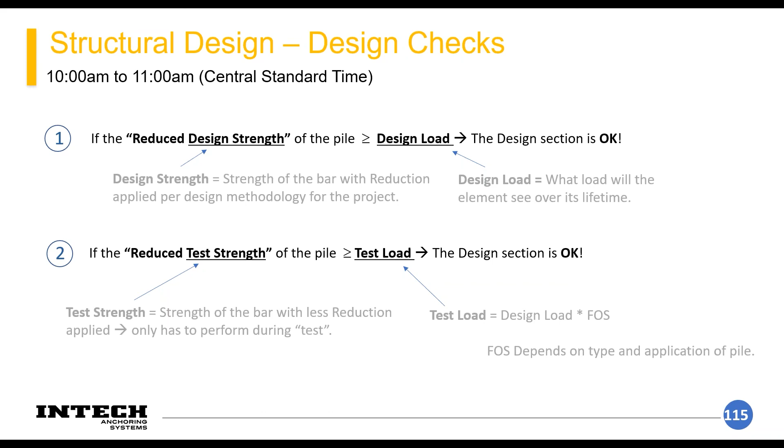Another thing we account for in designs is lateral load. For the most part, when lateral loads are more than a few kips, the pile section will likely need to be cased to achieve enough capacity to support them. So when we do our design, we're using AllPile. We add a design section, analyze it, and check the deflection and max moments. If the deflection is within the tolerance of the project, we move on to checking the flexural strength of the pile. If not, we beef up the section, add casing if necessary, and repeat until we have a passing section.

Now I'll move on to the geotechnical design. For the hollow bar elements, they're predominantly frictional. If you get into some competent rock, you can count on some end bearing, but for the most part they're frictional. The helical pull-down micropiles are a combination of that frictional component and also the remaining loads at the bottom going into the helical flights and end bearing. Each of them, as we discussed, has options to resist lateral loads with casing or just the grout steel section alone.

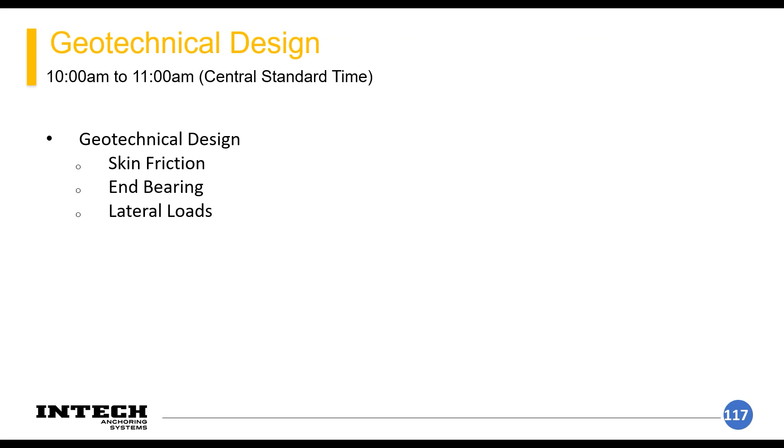For skin friction, we're creating a long, slender grout tube that will have contact with the ground. That tube has a surface area given by pi times the diameter times its length. This area, in conjunction with the bond strengths, will give you an overall resistance to downward and upward forces. We typically look to published values for initial design. FHWA has some values we typically look at, but you can always check it during construction with a load test, or use specific site experience if you have it. It's important not to count on soils in fill areas, unbonded, or free stress lengths or zones like that. If you have more capacity outside of these zones, then during your design life, you'll have more capacity.

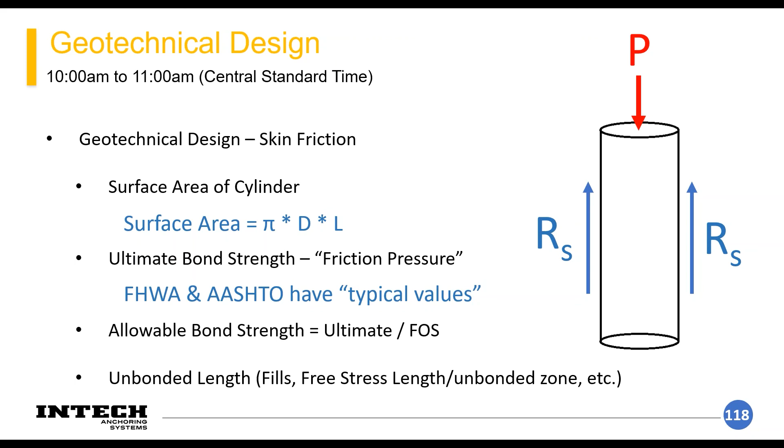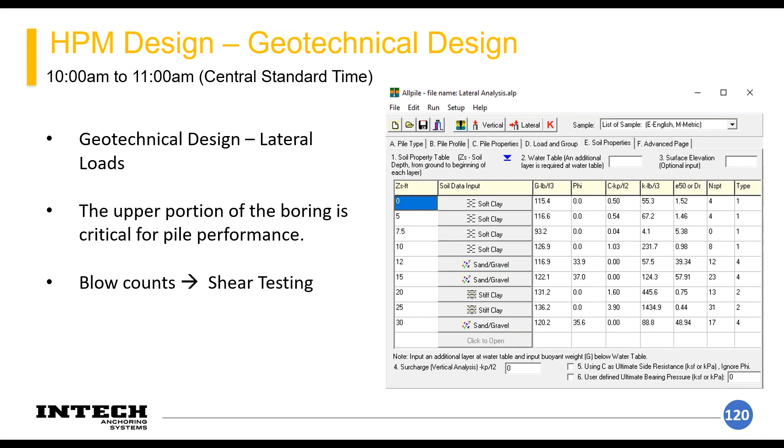Lateral loads from a geotechnical standpoint: it's important to understand the upper depths of the soils, within the first 10 feet, are the ones that are going to be loaded, and that's where your moments are going to be resolved. So it's really important that if you have a lateral load planned on a project, we get better resolution of testing and higher quality testing at those locations. Blow counts are good, but shear testing is better.